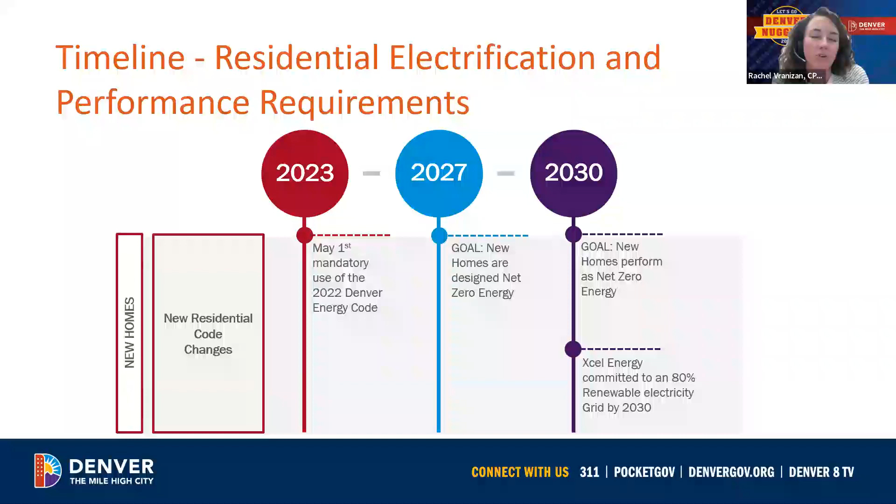This means we all have a part to play in making these changes, and we have time to accomplish them incrementally. The Denver Energy Code is grounded in input from a wide variety of community members and stakeholders, and we would like to thank all who contributed.

You can find the full 2022 Denver Energy Code at denvergov.org/buildingcode. A second printing of the full Denver Building and Fire Code, which includes the Denver Energy Code, was approved last week by City Council and is available on our website. The included updates are primarily housekeeping in nature, and all the relevant content has been incorporated into these trainings. Please take a look at the second printing to make sure you are referencing the most up-to-date version of the code.

I also want to highlight that Denver-specific ComCheck and REScheck are anticipated to be available in fall 2023.

You can find a wide array of additional resources at our Net Zero Energy Hub at denvergov.org/energycode. A recording of this training and the others in the series will be published on this page, along with resources on specific provisions and compliance options. Resources are being added continually, so please check back regularly to see the latest.

You will hear us use a single reference to a code section in the 2022 Denver Energy Code. This is because the 2022 Denver Building and Fire Code adopts the base codes as reference. It is a good practice to check Denver's code first to see if there are deletions or modifications to a section, then reference the base code.

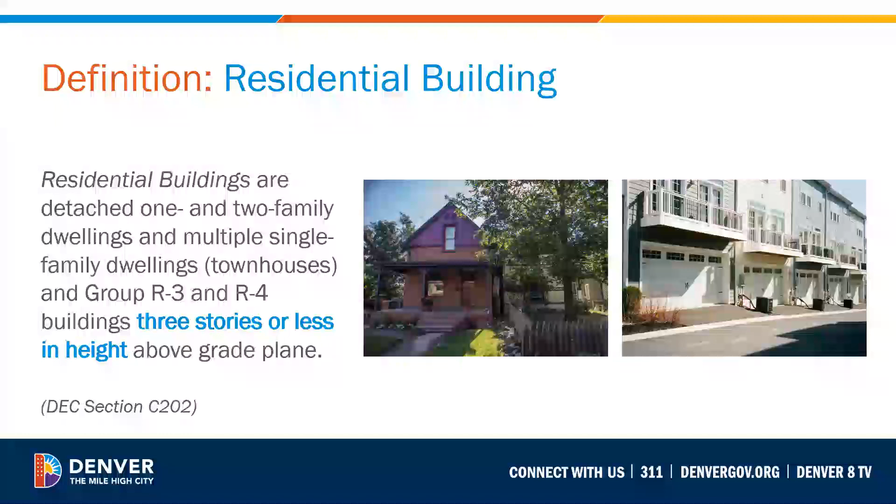As we begin today's presentation, I wanted to take a quick moment to review the definition of residential buildings. We've reviewed this definition in the past three presentations, so I'm not going to spend time reviewing it again here, except to really urge you to fully understand the definition and potentially take advantage of all the recorded presentations on the City of Denver's website.

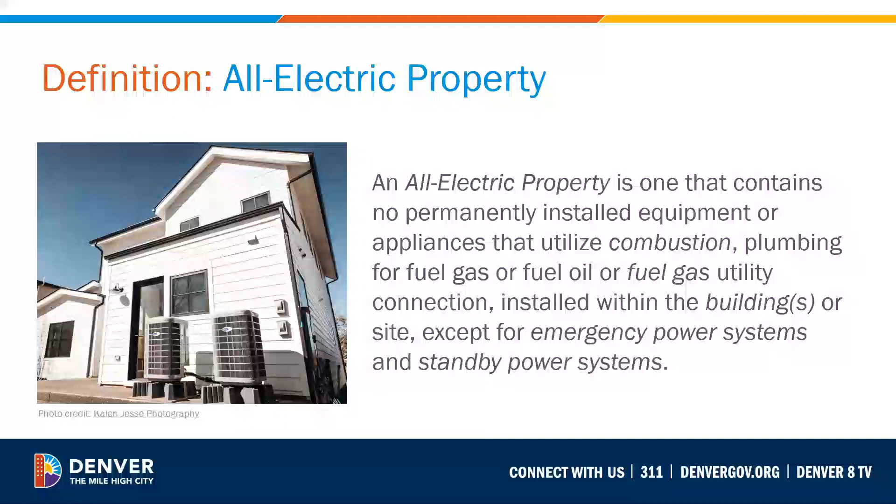All electric properties is a newly defined term that you should become familiar with. An all electric property is a property that contains no permanently installed equipment or appliance that utilizes gas or gas equipment for combustion within the building or on the site. The exception is for emergency power systems and standby power systems, such as gas-powered generators. Know that there's no exception for gas fireplaces, indoors or outdoors, or for any type of connected gas barbecue outside the home.

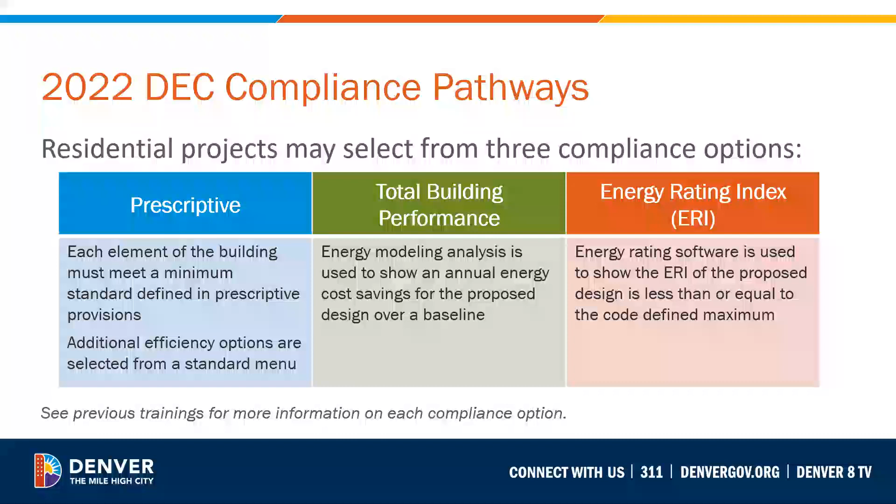The City of Denver uses a variety of options to demonstrate compliance with the Denver Energy Code. There are two options within the prescriptive path and two options in the performance pathway as well. I recommend that you review the specific prescriptive and performance compliance trainings that happened over the last few weeks, which are available on the city's website.

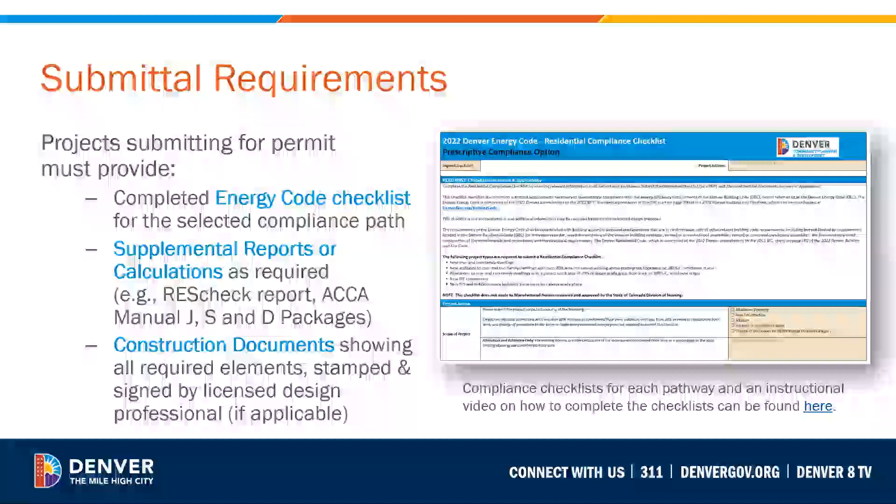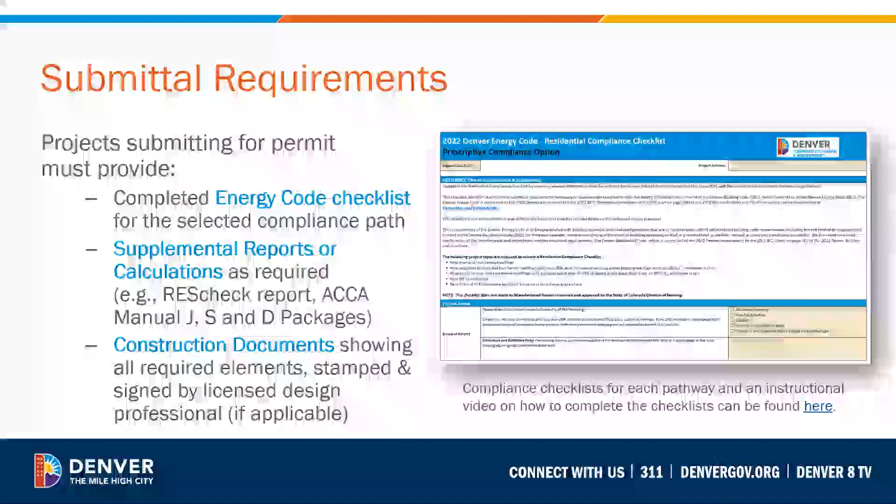Quickly, we're going to review some of the submittal requirements. Be sure to review and use the Energy Code checklist to understand requirements that have been implemented, and understand all the supplemental compliance reports that have to be generated for submittal, as well as to receive the certificate of occupancy, such as the UA compliance report, the cost compliance report, and the energy rating compliance reports that we're going to be talking about specifically today.

In addition, you should understand all the specific information that's required to be on the construction documents themselves. This includes the HVAC design, air sealing details, and the window to floor area calculation to determine the required U factor of the windows that need to be installed in your particular project.

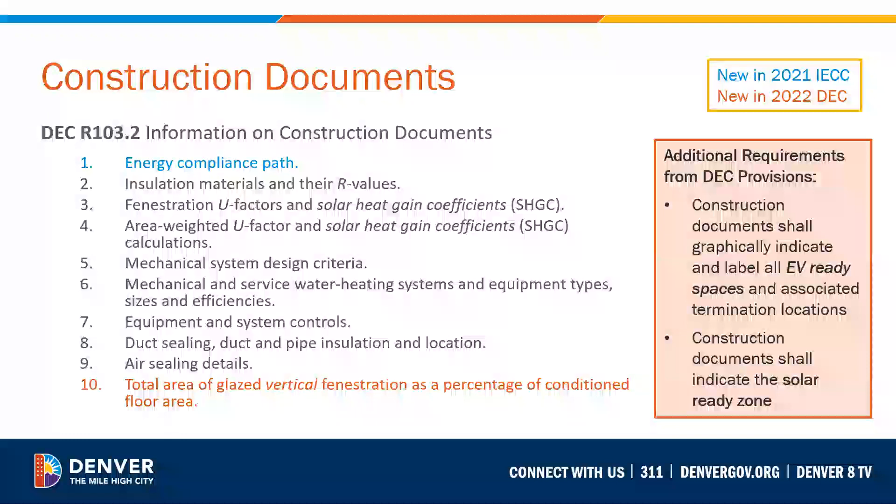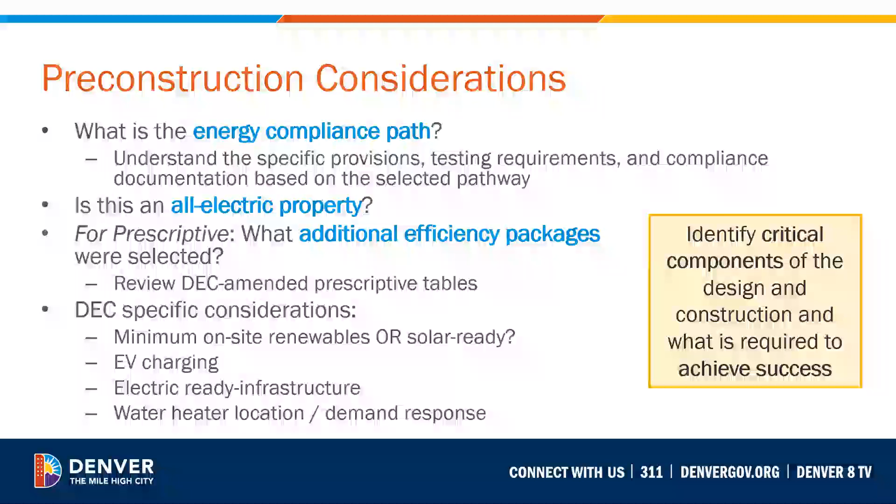When planning your project and creating the construction documents for submittal, we suggest that you clearly define the Energy Code compliance pathway, whether the project is an all-electric project or not, whether the project will have to comply with any of the additional efficiency package options in sections R408, and how you're going to address the Denver Energy Code specific provisions like on-site renewable provisions, EV charging, electric readiness, and water heater location provisions that we discussed in last week's training.

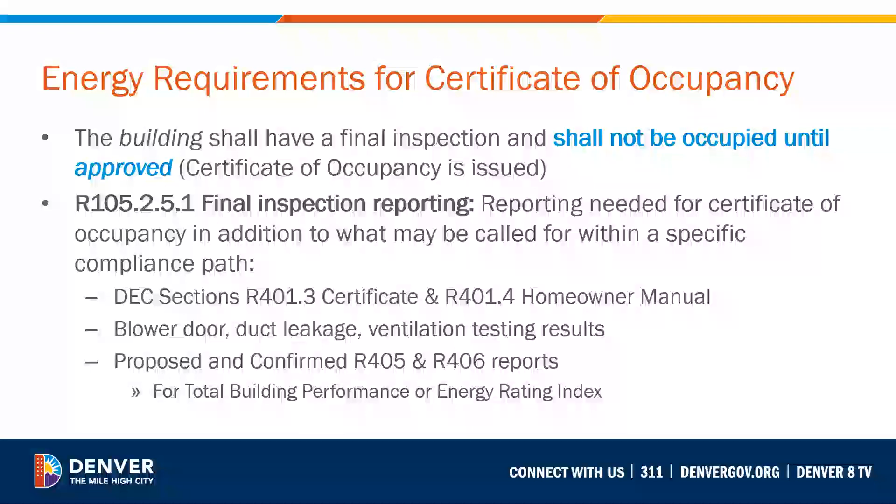The building obviously must have a final inspection and can't be occupied until the project is inspected and receives its certificate of occupancy. All the additional final compliance documentation also must be collected and reviewed before the home is occupied, and this includes all the final testing reports, as well as the...

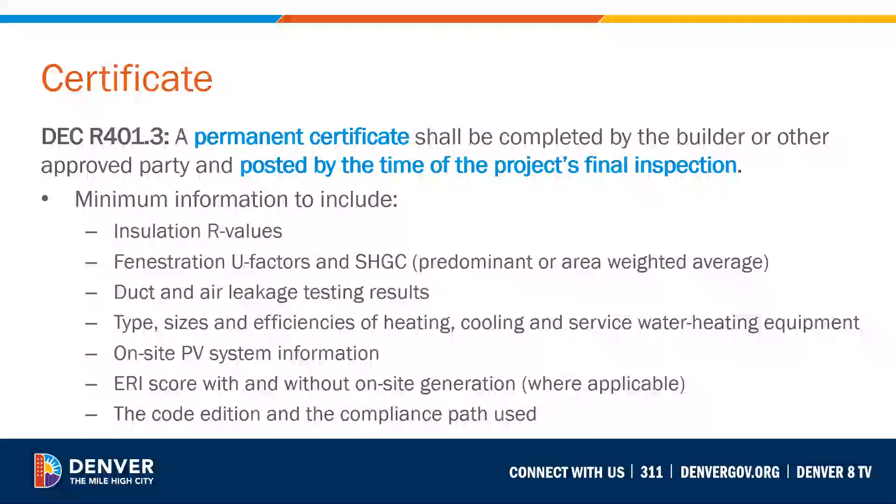R401.3 certificate. The project's final R401.3 certificate is not new to the Denver Energy Code, but there are some new items that have been included in the certificate, such as the PV system information requirement. It's recommended that you review these requirements so that nothing slows down your issuance of the certificate of occupancy at the end of your project.

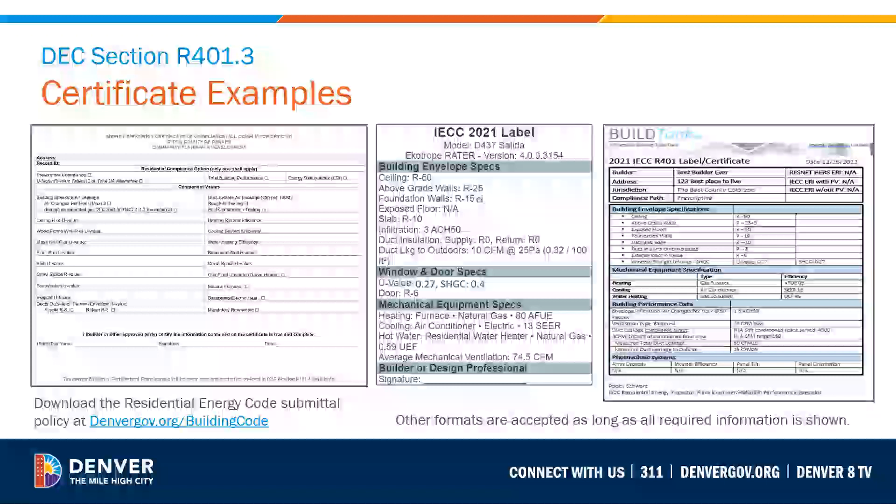Also, the City of Denver has created an R401.3 certificate template that you can use. There are certificates that can be created directly out of the software and printed out of the software, and you might see some hand drafted certificates out there as well that comply, especially when you're doing compliance with the R value and U value table compliance pathways.

So ultimately, as long as the certificate includes all the required information, including the Denver specific provisions, any of the formats are allowed by the City of Denver, but know that you have this template that you can use if you need to.

The homeowner's manual requirement is new for the Denver Energy Code, and it must be delivered to the house before occupancy. The manual must include all equipment and appliance manufacturer installation manuals and any energy assessment or energy rating index report, for example. Other pertinent information, like the yellow energy guide labels for all appliances, can also be included, but there's no specific requirement for what else needs to be included in that manual.

Okay, we're going to move on to considerations for the prescriptive path. When considering the prescriptive compliance pathway, remember to go back and look at the other presentations that are now posted on the City of Denver's website. We'll review some of the items covered earlier, this time from a contractor's perspective, but we are not going to be reviewing all of them. So you should go back and double check those presentations.

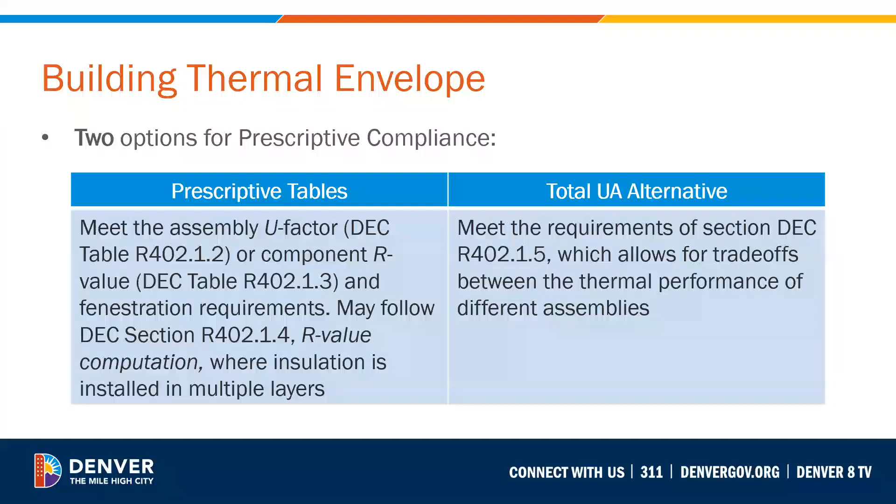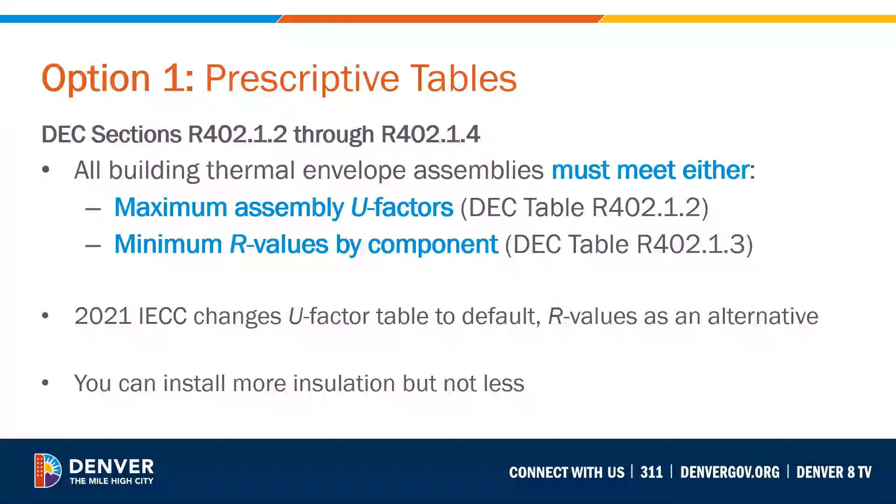Again, there are two prescriptive options for building thermal envelope compliance with the code. Option 1 uses the assembly U factor and component R value tables, and option 2 is a trade-off approach that uses a total area weighted U value energy modeling approach to demonstrate compliance. When using the prescriptive table option, you must choose to either use the required maximum assembly U factors listed in the table or the minimum R value by component requirement listed in the table. This compliance option is the least flexible, because you're only allowed to do more than what is required by the table there, not anything less. We'll see in the performance compliance options coming up that they provide additional design flexibility when considering the specifications for your project.

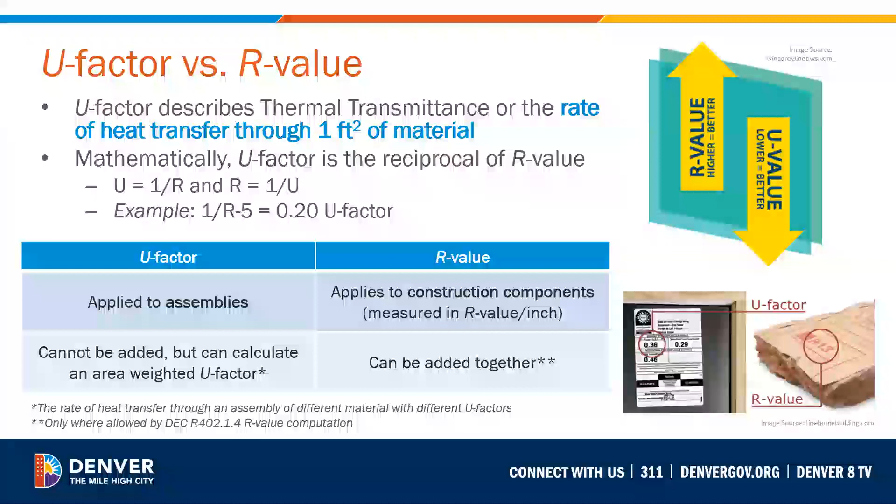Now we need to do a quick review of U factors and R values so we can understand these tables in more depth. A U factor describes thermal transmittance, and is the reciprocal of the R value. So if you start with an R value of 5, that's equal to 1/5, or a U factor of 0.20. U factors are used to describe assemblies, and R values are used to describe construction components. An R value describes the material's ability to resist the flow of energy, always from more to less, high to low, or from higher concentrations to lower concentrations. The higher the number, the greater the resistance to the flow of energy. For U factors or U values—those two terms are kind of interchangeable—the lower the number, the greater the resistance to the flow of energy.

When using the prescriptive compliance approach, you can also use the R value computation method. For example, if you install flash foam and fill the remainder of the cavity with blown fiberglass, you can add together the R values of each individual insulation component to get the total R value of the insulated cavity. Note that in the code, continuous R value requirements are separated from cavity R value requirements, and the R value table describes the component R value, not the assembly. Therefore it excludes framing, air films, and the like that are included in the U factor assembly table. The U factor table is also used to build the code reference home that I'll be showing you in just a few minutes.

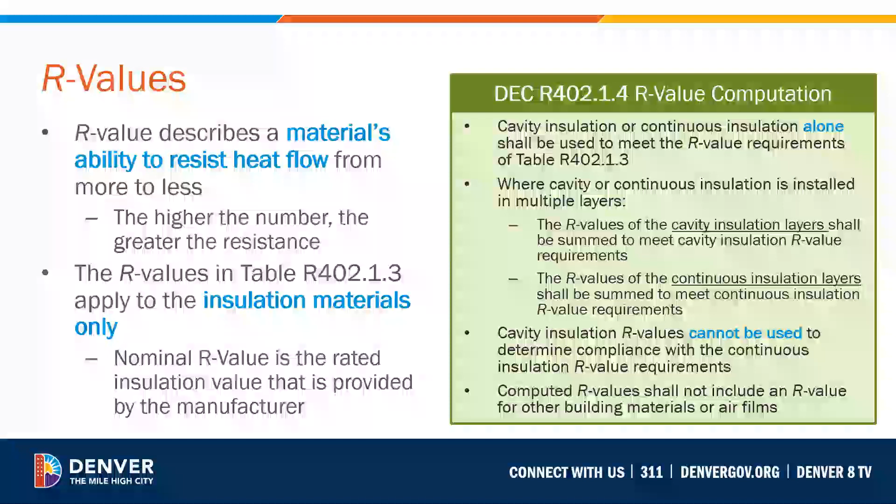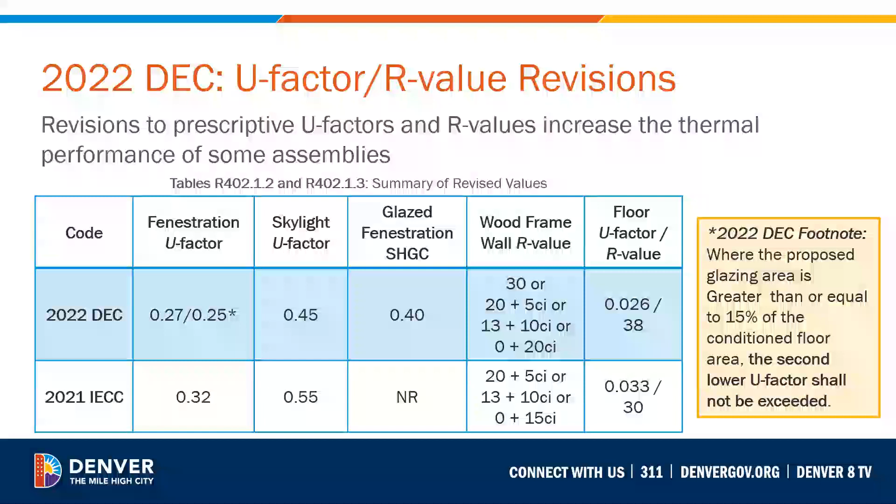Now, we know that windows are simply the weakest link in the building assembly. As you can see here, the R value of a wall assembly is about 3 times more than the R value of a good performing window. Therefore, the lower the window to floor ratio, the higher the total wall R value and the less heat loss in cold months, for example.

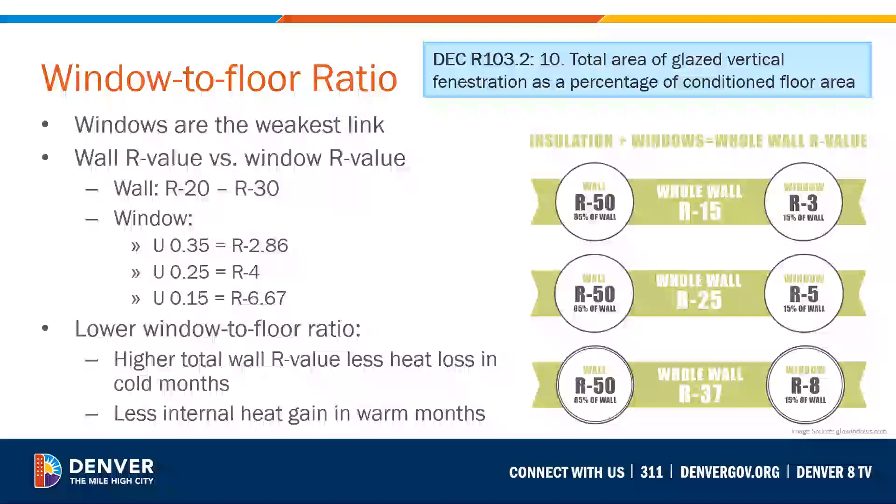This is why the window to floor ratio is used in the Denver Energy Code prescriptive compliance pathway to determine the U value requirements for the windows that need to be installed in your project.

Now, moving on to the second prescriptive compliance option for building thermal envelopes, it's called the total UA alternative. UA stands for area weighted U value. This is a software modeling compliance approach.

You should note that if a project is designed to the prescriptive R value and U value tables and a specification change happens in the field, you'll likely be required to do a total UA analysis to verify compliance. We'll cover that again here in a second.

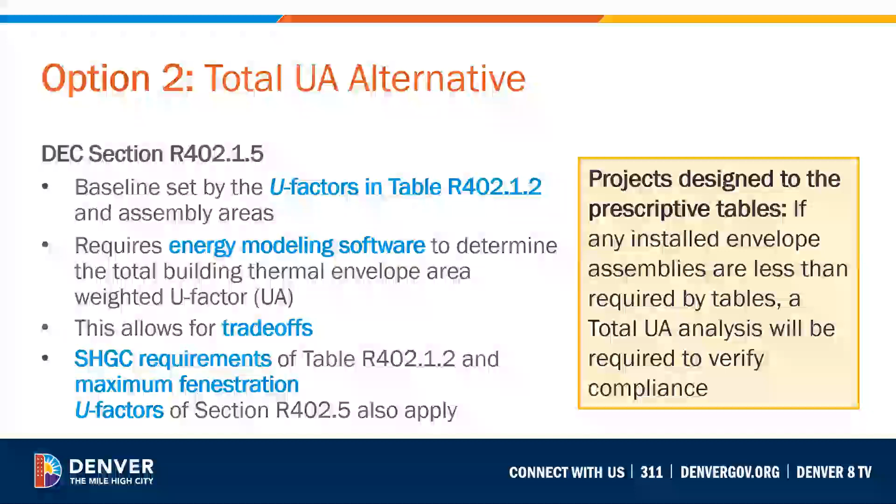When we talk about using software to demonstrate compliance with the Energy Code, we have to understand the concept of the reference home and the rated home. So when we build a home within an energy model, the energy model creates 2 homes that are geometric twins of each other. One is called a reference home and one is called a rated home. Now, a reference home is specifically defined as a standard set of specifications that generate a specific, consistent, and quantifiable energy performance for that particular program or code.

So the reference home in this case is overlaid with the U factor table to give it that standard specification for energy performance. The rated home specifications are created by the builder and the design team, maybe the architect as well. The rated home is compared to the reference home, and if the rated home's performance is equal to or better than the reference home, then it will demonstrate compliance with the code.

So when we talk about total building thermal envelope performance, the area weighted U value of the proposed building must be less than or equal to the total area weighted U value of the reference home, resulting from using that U factor table. The U value or the area weighted U value in the energy model includes thermal bridging or framing, air films, and all the layers in the assembly, which is why this pathway is called an assembly approach for compliance.

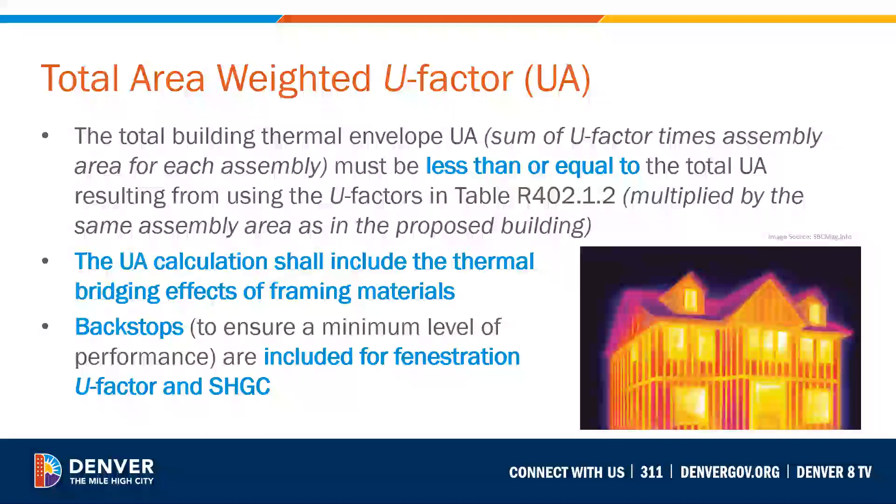Section R402, 402.5 specifically states what the maximum area weighted fenestration U factor and solar heat gain has to be. So these are what we call backstops, which ultimately prevent trading off beyond a specific point, with the ultimate goal of protecting the building thermal envelope from excessive trade-offs.

Now, trade-offs are used to put something more in one assembly so that you can put something less in another assembly to gain more flexibility in designing the specifications for your house. Again, in this pathway, you can only trade off U values and R values when using the UA alternative approach.

So for example, in order to get a balanced energy equation that meets the intent of code, the blue ball in this balance equation here might represent ceiling insulation that's R38, which is significantly less than the requirement in the prescriptive pathway for R60 in our ceiling insulation.

In order to have that balanced equation, the 3 silver balls might represent better windows and wall assemblies around the building thermal envelope that exceed the minimum prescriptive table requirements, and thus give us this balanced equation with more flexibility in how to design our assemblies that we're going to put into our home.

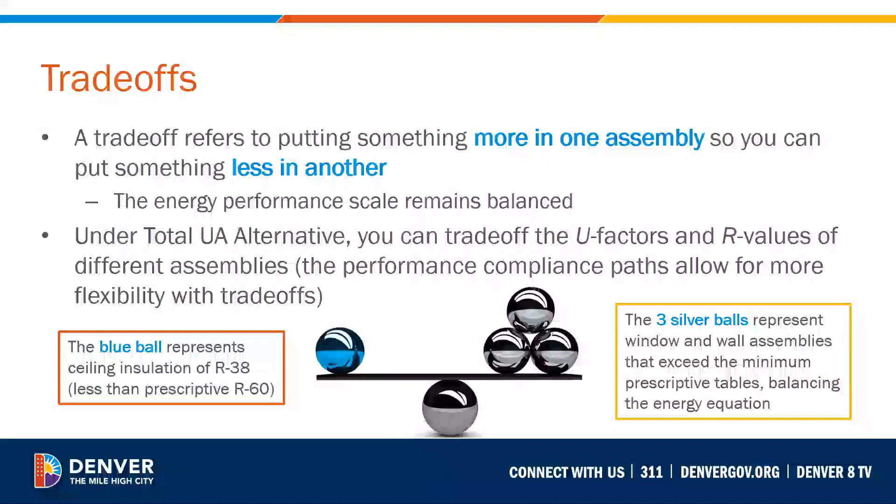The area-weighted alternative offers this flexibility, and it demonstrates compliance using R values and U values that are in those tables. This is a method of performing conductive energy trade-offs. However, we have to remember that with this approach, you're only able to trade off R values and U values in the building's thermal envelope. You'll see in a bit here that the performance compliance approaches allow for more than just conductive energy trade-offs, and thus more design flexibility.

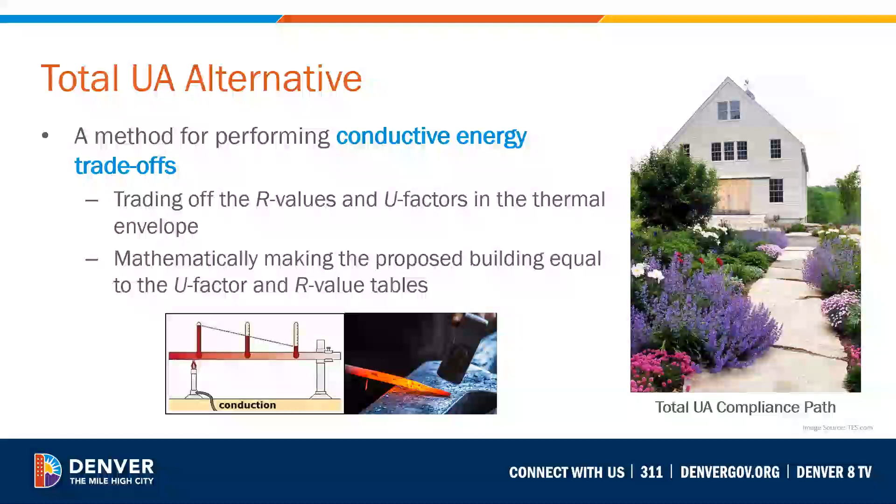While there are multiple softwares available that can calculate the total UA of a building, only the REScheck software, which is a free software developed by the U.S. Department of Energy, is going to be adapted to include the Denver amendments to the IECC. Therefore, no other software can be used to demonstrate compliance. Right now, the Denver Energy Code version of the REScheck software is still in development and will be available in the fall of 2023.

So to be clear, although softwares like Ekotrope and REM/Rate can do the UA calculation, only REScheck is allowed to be used for the Denver Energy Code total UA compliance pathway, because only the REScheck software will incorporate the specific Denver Energy Code amendments for prescriptive compliance.

Again, the REScheck software modification will be released in the fall, and this is an example of the REScheck report that the City of Denver will require to be turned in at permitting when using the total UA alternative compliance option. Now let's look more closely at that blue box there.

In the blue box, you can see that compliance in this case has been demonstrated using area-weighted U values of the reference home, which is the maximum area-weighted U value, and the rated home or builder home, which is your area-weighted U value. You can see that 292 is better than 328. Therefore, we have compliance here, and in fact, it's 11% better than the reference home compliance, or base 2021 IECC compliance.

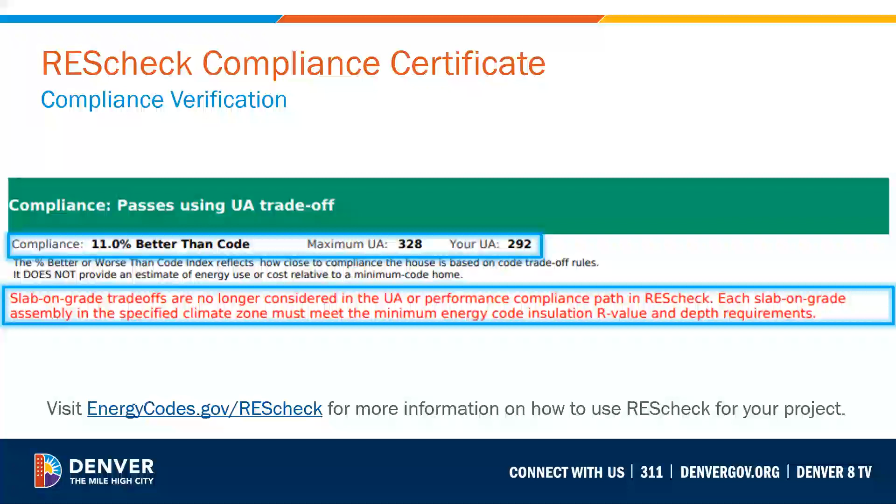Now, you'll also notice the other blue box here, that slab edge insulation can't be traded off when using this pathway. So you want to make sure that you understand this if you're doing a slab on grade construction or a walkout basement that includes a slab on grade.

Now, because the customized REScheck software will not be available until the fall, the City of Denver has developed a REScheck workaround so that the current version of REScheck can be used until the customized version is released. In the REScheck workaround, the additional calculation will have to be done by hand. We explained this in depth in the previous trainings, so you want to go to those trainings and make sure that you have a good understanding of this REScheck workaround process.

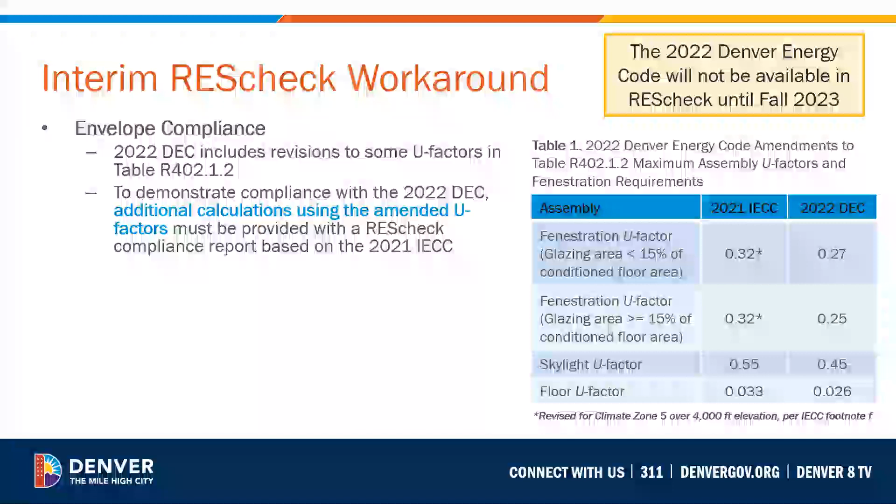In general, if something is installed that is better performing than proposed in the prescriptive compliance reports, then you should be okay if something changes in the field. If something is installed that is less than approved by the building permit, you will have to submit possibly a new UA compliance report to demonstrate that the trade-offs still create a balanced energy equation and meet the intent of the energy code. Remember that you cannot trade off when using the R value and U value tables. Therefore, if something changes in the field, it has to be better than in order to pass code through the inspection process. In addition, the city may require additional documentation, or you'll have to move to a REScheck software modeling compliance approach to demonstrate compliance with the code.

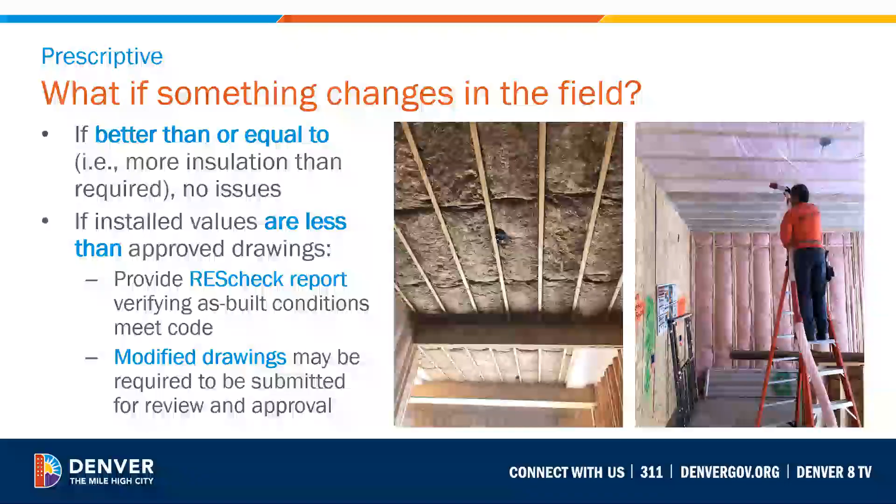Okay, we're going to move on to considerations for the prescriptive path and these additional efficiency packages. Prescriptive compliance requirements mean that a project must comply with the entirety of all applicable provisions located in sections R401 through R404. Additionally, prescriptive projects only have to also comply with the additional efficiency credits required in sections R408. The number of credits a project must comply with is dependent on the building type and whether it's an all-electric property or not.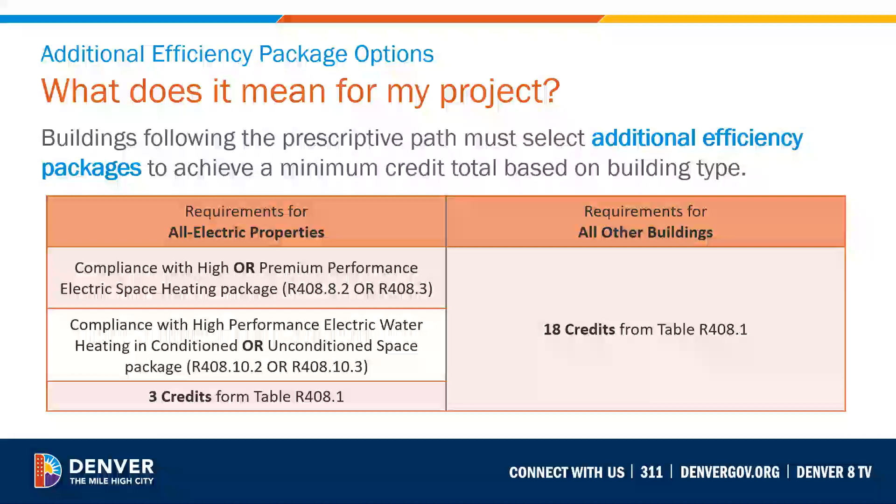All-electric buildings have an easier way to comply with these additional efficiency packages, in order to promote building electrification and to align with the zero energy goals that the city has.

Tracking the additional efficiency credits can be a little bit complex, so be sure to utilize the new R408.1 planning tool that's been embedded into the prescriptive code checklist available on the city's website.

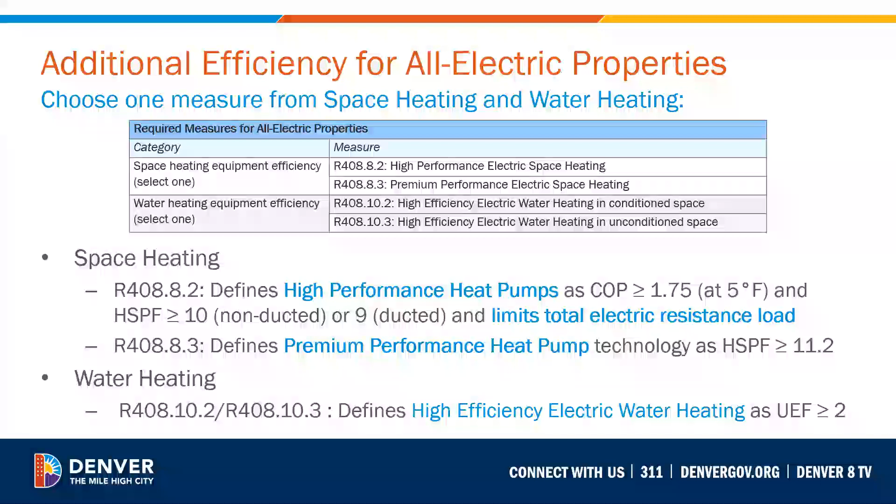Here is an example of what an additional efficiency requirement looks like for an all-electric home. You need to choose a space heating and water heating option based on the parameters outlined in R408 of the table here. So in this case, you have to choose either a high performance heat pump or a premium performance heat pump for an all-electric building. Then you need to choose an option or multiple options that equal 3 or more credits to fully meet the all-electric additional energy efficiency requirements for the code.

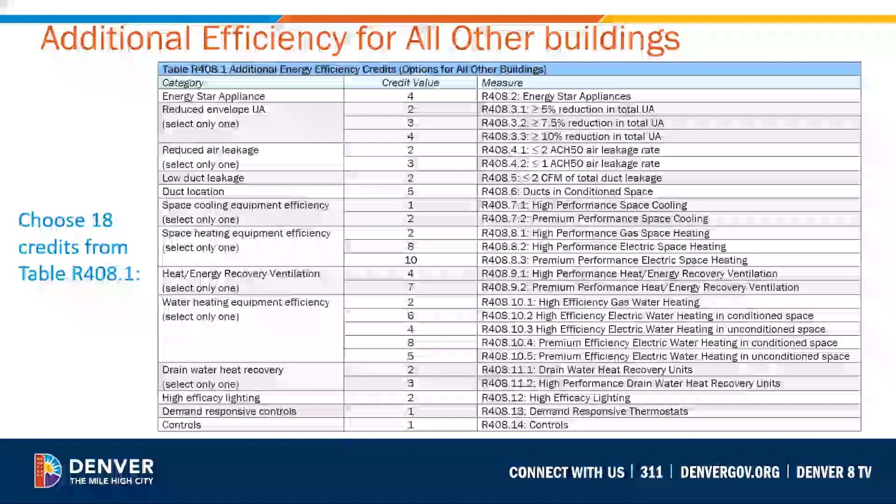For all other buildings that are not all electric, you will need to choose and implement 18 credits from the list of additional efficiency options on this checklist. Remember to review the recorded prescriptive compliance presentation or the Denver Energy Code itself for more information on the additional efficiency option requirements and what they actually are that you can choose from.

At submittal, fill out the prescriptive code compliance checklist, which we just reviewed. You only have to fill out either table 1 or table 2, depending on the building type, whether it's all electric or not.

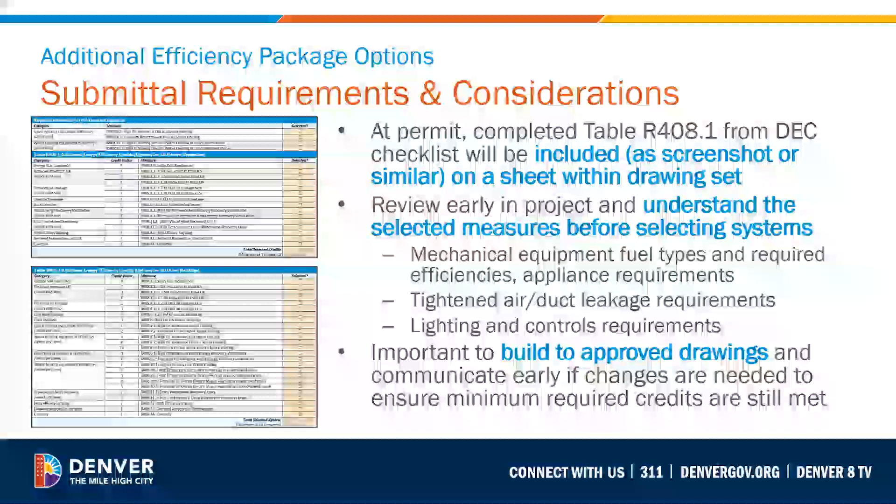In addition, you'll have to include your table choices on the construction documents for permitting of the house, because your choices will be reviewed for permitting and also inspected in the field to confirm compliance before the certificate of occupancy is released.

Even though it does not offer as much flexibility, the prescriptive compliance options are more straightforward than the performance approaches that we'll cover here in a little bit. There is no requirement to turn in a compliance document that confirms that the energy specifications that were proposed were actually installed in the as-built home. Field inspection alone is used to ensure compliance.

If you fail a site inspection, you may be required to provide an updated REScheck report in addition to fixing any requirement that may have failed.

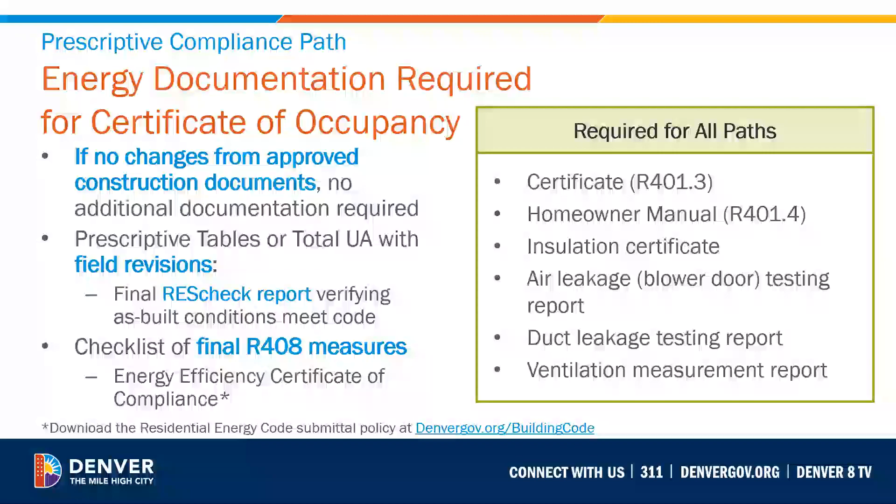Now let's look specifically at the total building performance compliance option. This section is R405, and it establishes criteria for compliance using a total building performance analysis. The analysis only includes heating, cooling, mechanical ventilation, service water heating energy use, or building assemblies or components that directly affect the building thermal envelope.

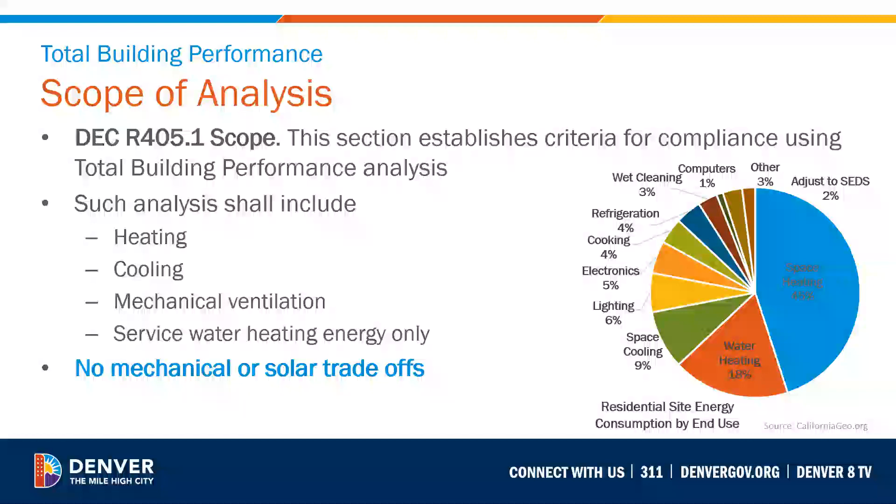This compliance option does not include mechanical or solar trade-offs. And you can see here in the pie chart on the right that heating, cooling, and water heating are the largest energy demands on the home, and that's why the Energy Code concentrates on them specifically.

As I said earlier, the energy modeling creates two homes that are geometric twins of each other. However, now the reference home specifications are defined in a table in section R405 within the IECC itself that you can take a look at. The proposed design specifications are set by the builder and the designer. And just like earlier, the proposed design is compared to the reference home to determine compliance with this compliance pathway.

So what does this mean for your project? The project design must meet the requirements in table R405.2 and comply with any backstop, meaning that in this case, you cannot trade off below the building thermal envelope requirements as described in the 2009 IECC. Now, in reality, this backstop turns out to be pretty irrelevant for the Denver Energy Code, although it's written in the IECC itself and has been included in the Denver Energy Code.

And the reason is that the Energy Code requires all electric properties to be 5% better than the reference home, and that all other electric buildings or homes be 18% better than the reference home. This means that the specifications used will have to be close to or even better than required by the 2021 IECC, as the reference home used for 2021 IECC compliance uses the U-value table requirements that are in that code. So as you see here, the Denver Energy Code is asking you to be better than the 2021 IECC.

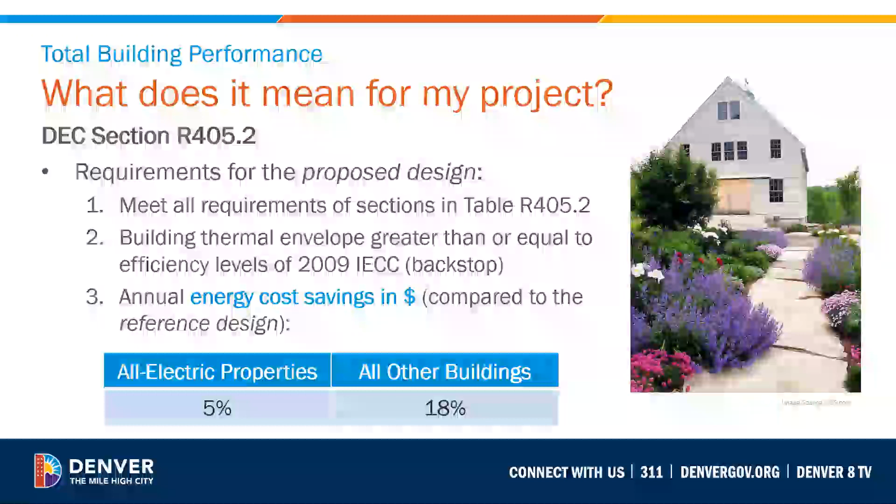Now, this is the R405.2 requirements table. And regardless of the compliance approach that's used for the project, there are additional requirements in sections R401 through R404 of the Energy Code. The 2021 IECC removed the language that described these requirements as prescriptive or mandatory. They are now just requirements and are listed out per the compliance option that you choose to use.

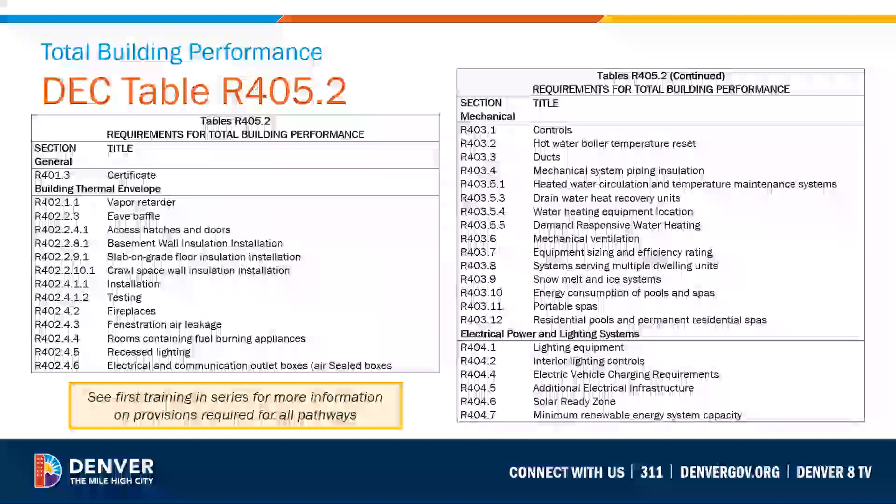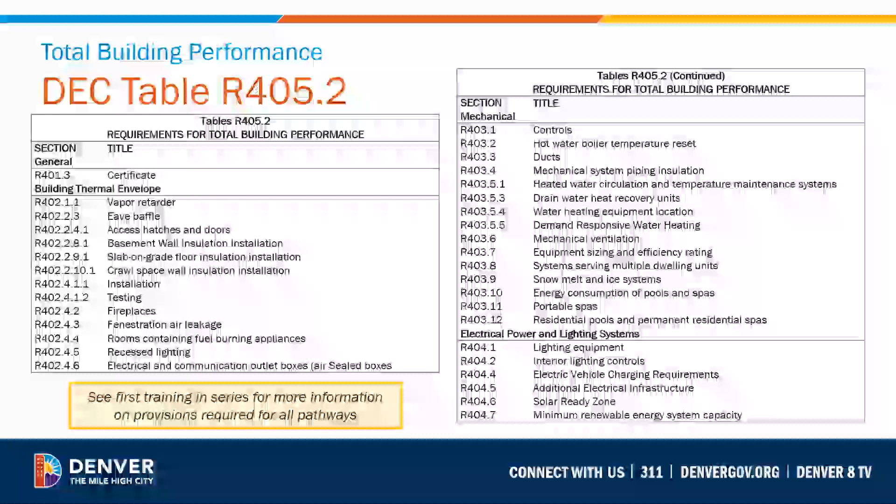In essence, though, you can think of these requirements as mandatory requirements that primarily address the installation of specific efficiency measures in the code. We spoke of these requirements in more depth last week in the recorded presentation, and that presentation is again available on the city's website for your review.

Now, especially when using the performance and energy modeling approaches for code compliance, it's important to realize the holistic and synergistic nature of the Energy Code and how it's implemented. The focus is on overall building performance over individual components, assemblies, or specifications. But a change in one area of the building can dramatically impact the building as a whole or other aspects of performance of that building.

Therefore, it's important for Energy Code compliance to be sure the building is built to the approved drawings and to focus on the installation of efficiency measures so that they perform and actually pass inspection. And then if changes are made in the field during the construction process, you'll need to consult with the design team, which may necessitate an updated energy model to demonstrate compliance.

Like the prescriptive compliance option, a cost compliance report for the proposed design must be turned in for permitting. This report must be marked as proposed because the energy model includes air and duct leakage default numbers, since the house hasn't been built yet. They're used to determine compliance before the house is actually built.

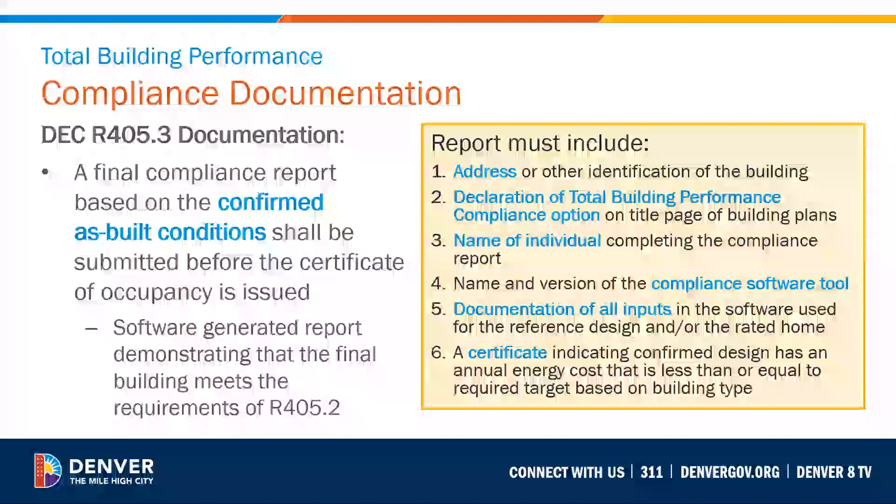Here's an example of the cost compliance report from the REM/Rate software. Note that this example home passes the 2021 IECC by 7%. Remember that this meets the requirements for all-electric properties in the Denver Energy Code, but would not meet the energy savings requirements for a mixed fuel or non-all-electric home.

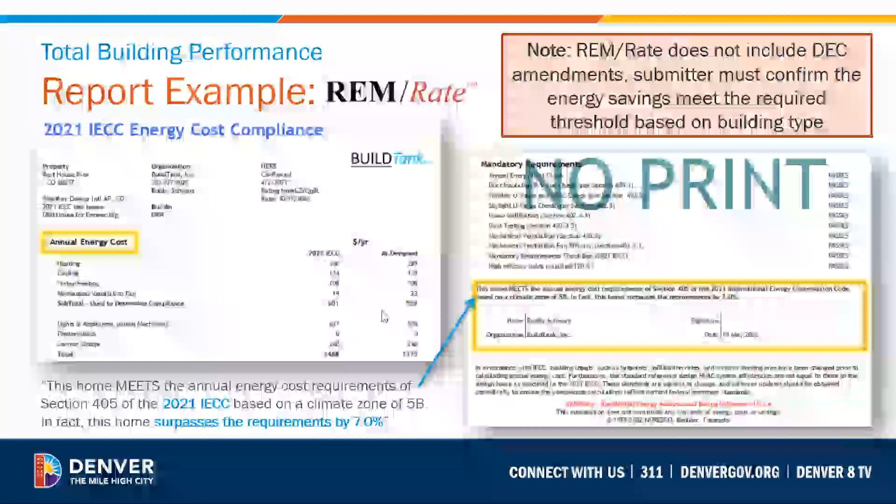Here's another example of a cost compliance report, this time from the Ekotrope software. This house is showing compliance by 5%, which again is better than the 2021 IECC and meets the requirements for all-electric homes in the Denver Energy Code, but doesn't meet the requirements for non-electric homes.

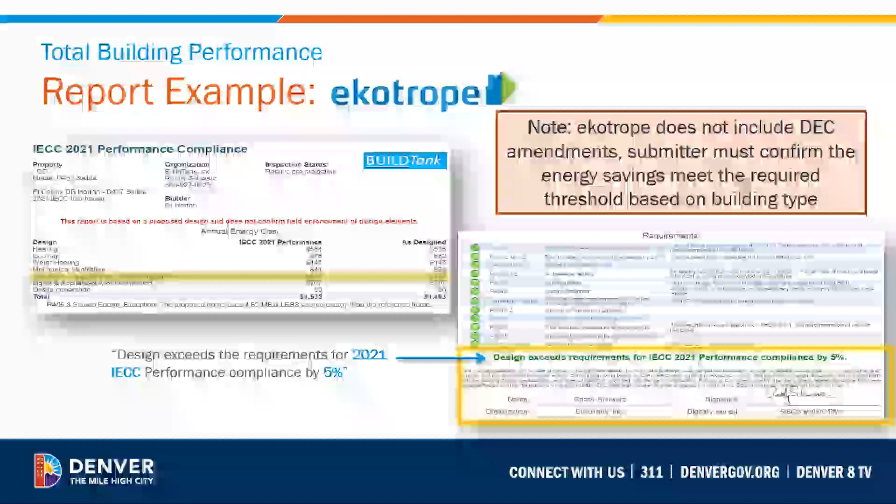As noted in the header of the software report, and regardless of the software that generates the report, it must note that this is a proposed design for permitting purposes. You have to realize that you have to create this report again and have it marked as confirmed in order to submit it for your certificate of occupancy to be released.

The confirmed compliance report is your final site cost compliance report that includes any information obtained during the inspection process of the home, such as the actual blower door and duct leakage testing results. If significant changes were made in the field, modified drawings may be required to be submitted for approval, and additional energy modeling may have to be performed.

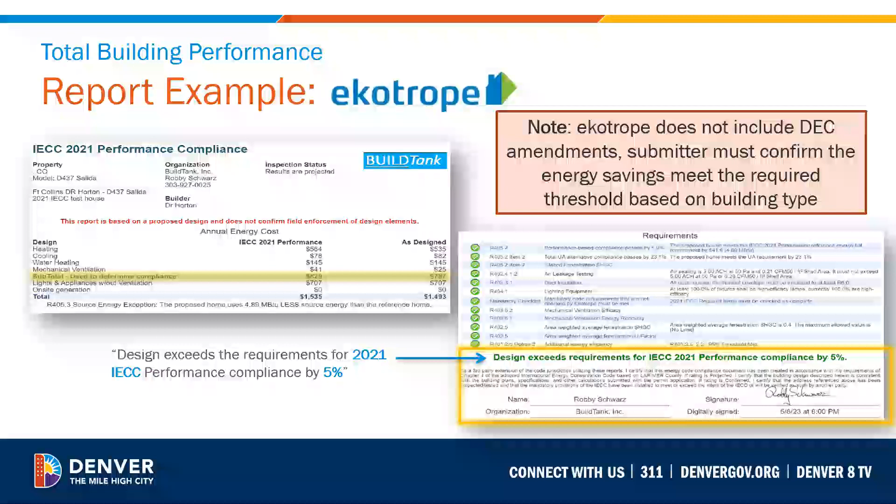Now we're going to take a look at the ERI, or Energy Rating Index compliance option. An energy rating index uses an energy model to perform a holistic energy assessment of the home. The energy model includes lighting, appliances, mechanical efficiencies, as well as R values and U values and more, to do what's called an asset rating.

The ResNet Home Energy Rating System, or HERS rating, is the most well-known energy rating system out there. You can think of an ERI score, or an energy rating index score, as a miles per gallon rating for a house. It doesn't matter who manufactured the house or the size of the house, in the same way that it doesn't matter who manufactured a car or the size of a car when you're evaluating that car from a miles per gallon perspective.

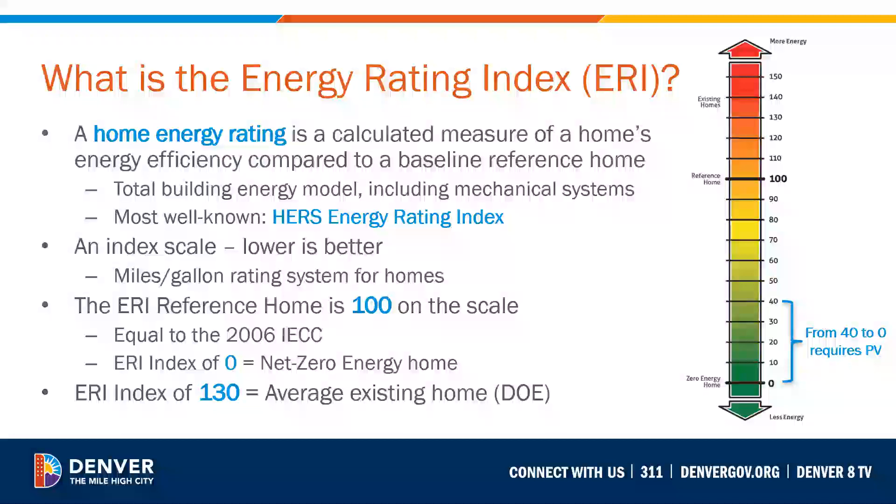An ERI index score of 100 benchmarks the reference home, and the reference home is benchmarked using the specifications of the 2006 IECC. The design performance presentation we did earlier is available on the city's website and goes into more depth on the ERI system if you need to understand that further. I'm going to continue here to talk about the IECC and how it used the ResNet ANSI 301 standard when they created the energy rating index score that's used by the Energy Code.

However, during the IECC code development hearings, they amended the ANSI standard ventilation requirement in section R406.3. This change to the ANSI 301 standard resulted in an IECC energy rating index score and a ResNet HERS energy rating index score for the same house being significantly different from each other. Therefore, like many other jurisdictions around the country, the Denver Energy Code has adopted the energy rating index based on the ANSI ResNet 301 standard with no ventilation amendment, in order to align better with the HERS ERI scoring system.

The goal of this adoption is to simplify the process and eliminate any confusion with the use of the ERI for demonstrating code compliance. So to be super clear here, the ResNet HERS ERI score is the compliance score used by the Denver Energy Code for this compliance pathway.

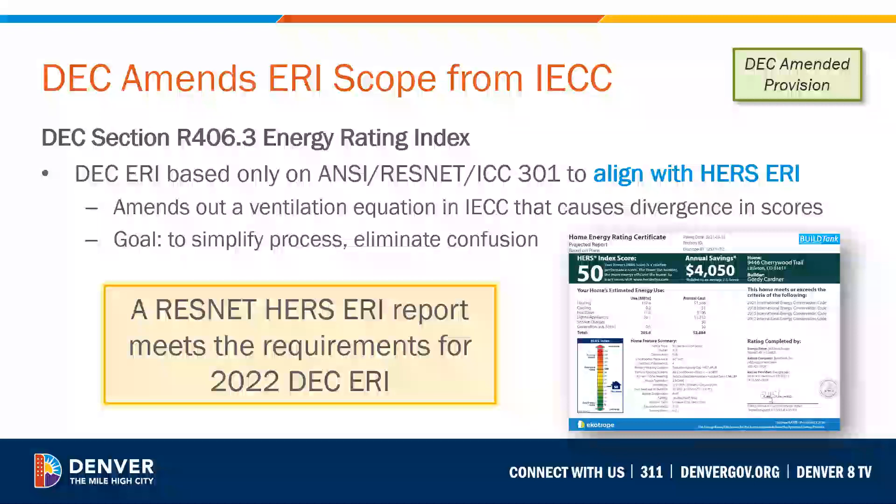Remember that within the software, there are two houses that are created that are geometric twins of each other. You have the proposed design, which is compared to the reference home. The reference home, in this case, is overlaid with the specifications required by the ANSI standard 301, which is equivalent to the 2006 IECC.

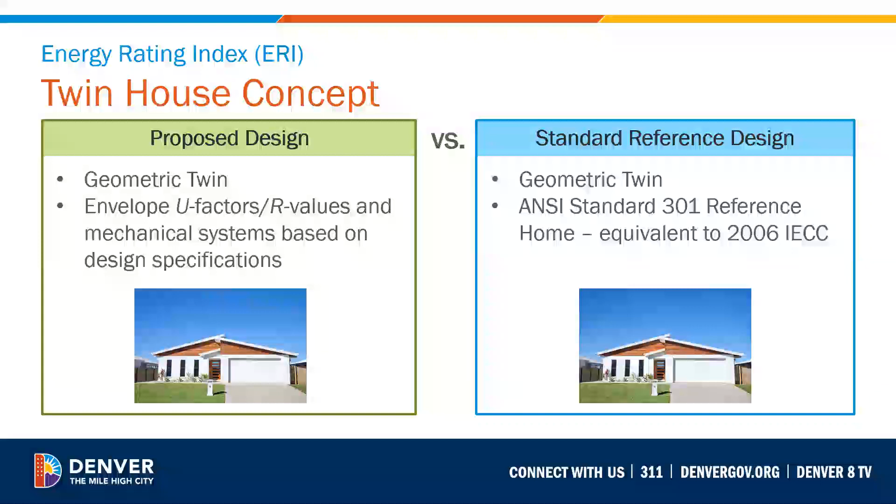The proposed design uses the specifications that the builder and designer have specified for that particular house. The objective of this analysis is to benchmark the proposed design as an ERI score in relationship to the ANSI 301 standard. What this means for your project is that the specifications you propose in the proposed design need to be able to perform significantly better than the 2006 IECC. In fact, they need to perform well enough so that they can achieve an energy rating index of 55 or less for an all-electric home, and 50 or less for all other homes that are not electric.

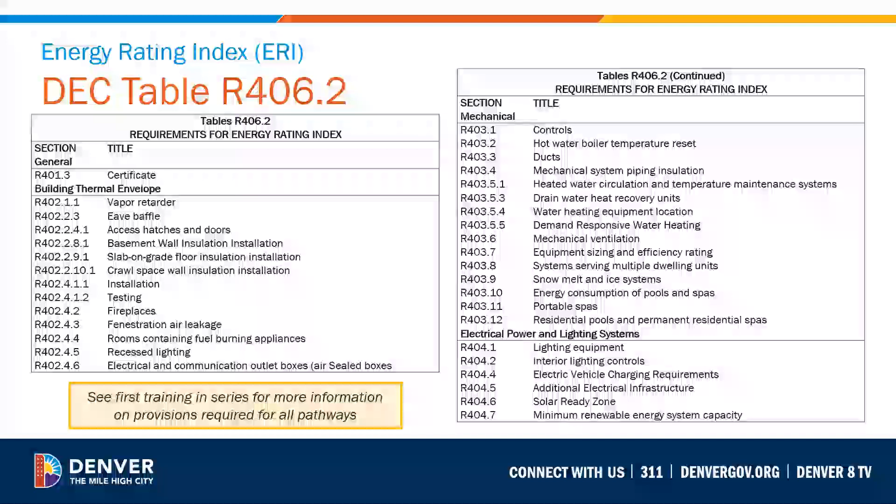In addition to this, your project will have to comply with the requirements listed in Table R406.2, which are the same requirements we just covered, the requirements in R401 through R404 that we covered previously in the total building performance approach.

Note that the additional efficiency packages in section R408 are only required for projects following the prescriptive compliance pathway and are not required when using either of the performance compliance pathways we've talked about. The reason is that the additional efficiency has been built directly into the performance requirements for both the total building performance and the ERI pathway.

Remember the 5% better and 18% better cost compliance reports required in the total building performance pathway, and the energy rating index scores of 55 and 50 in the ERI compliance pathway.

You should note that in the original printing of the Denver Energy Code, the requirements tables R405.2 and R406.2 for the performance compliance pathways inadvertently included some requirements that are not actually required. So a second version of the Denver Energy Code has been put on the website, and an errata has been published that you should review to ensure you're working with the most correct code language when determining your compliance pathways and ultimately compliance with the Denver Energy Code.

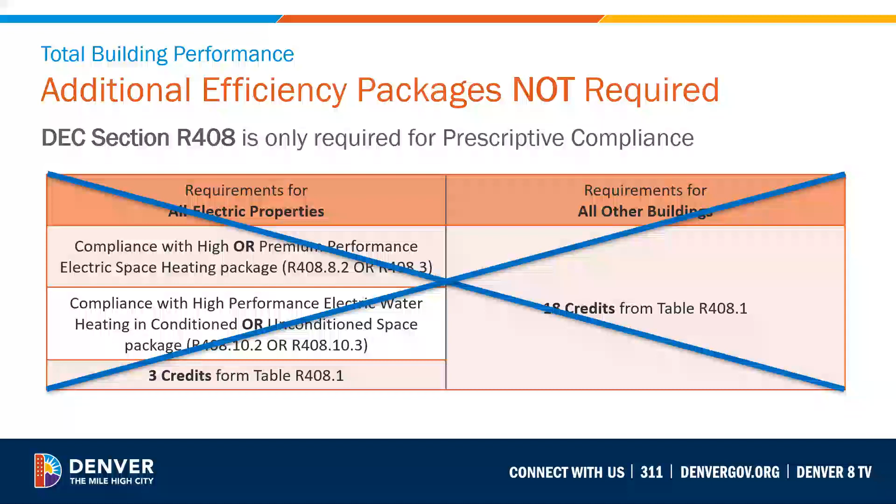As I said before, especially when using the performance or energy modeling approach for code compliance, it's important to realize the holistic and synergistic nature of the energy code, and if changes are made in the field, to consult with the design team immediately, which may necessitate an updated energy model.

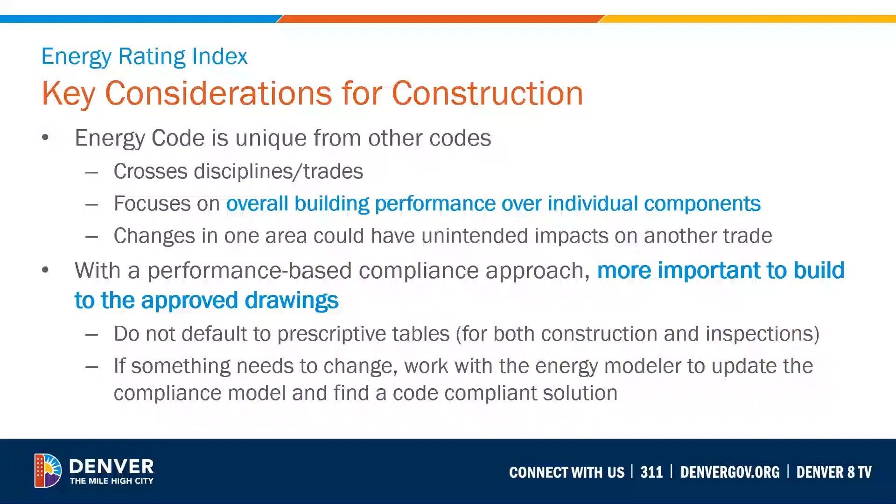As with the total building performance compliance report or process, your ERI reporting needs to be clearly marked as proposed for permitting and confirmed for issuing the certificate of occupancy, and also include all the information required by the code and reviewed on the slide.

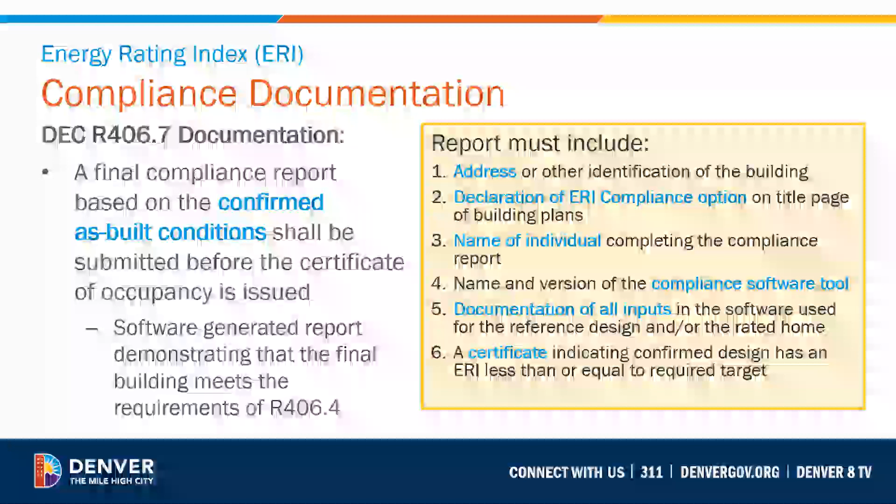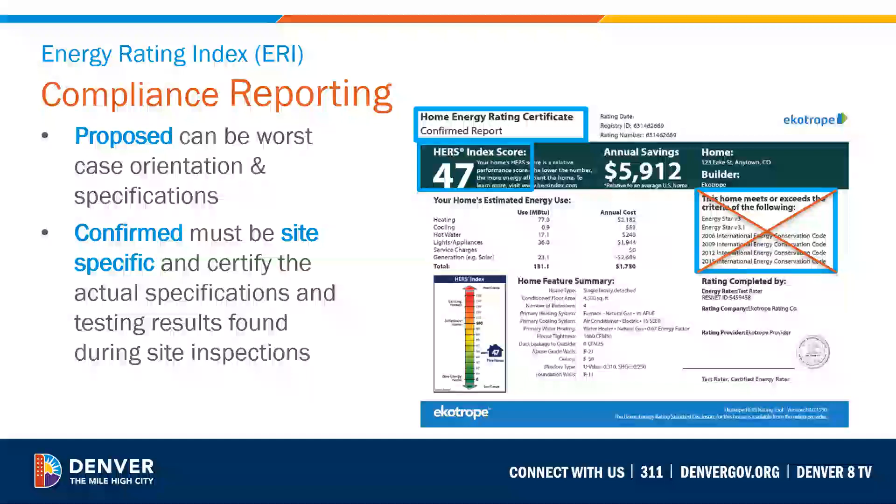Ekotrope and REMrate softwares are the primary softwares used in the Denver Energy Code, and used primarily in the Denver metro area to report compliance with the performance pathways of the code.

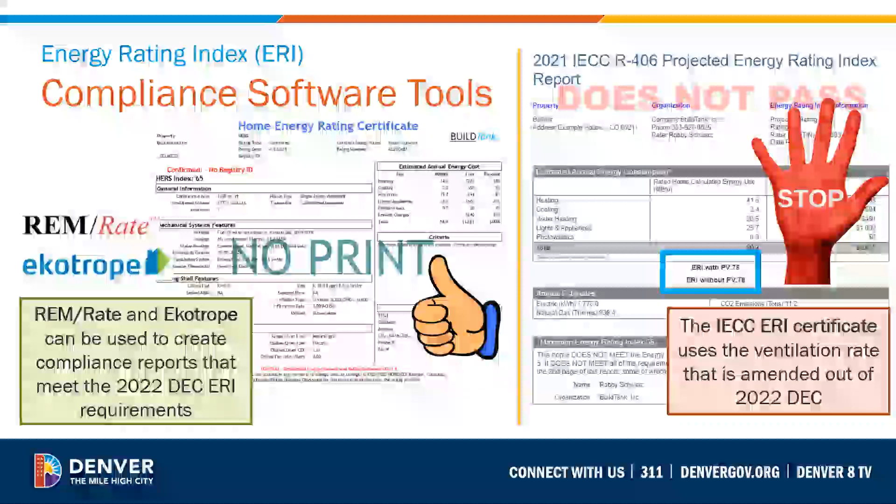On the left side of this slide, you'll see an example of an acceptable REMrate home energy rating certificate. On the right side, you'll see an IECC energy rating index certificate. This certificate is not accepted to demonstrate compliance with the Denver Energy Code. So only turn in a HERS home energy rating certificate from either the REMrate or the Ekotrope software.

Now we're going to spend the rest of our time looking at some existing building considerations. The Denver Energy Code addresses additions, alterations, and repairs, as well as change of occupancy in existing buildings in order to maintain or improve the energy efficiency of that altered building.

It's likely that you'll have to clearly define your existing home project in order to determine what you're actually going to be required to do by the Energy Code. So you'll want to review these definitions of the work categories for repairs, alterations, additions, and change of occupancies, so you'll have a better idea of what you actually have to do to demonstrate code compliance.

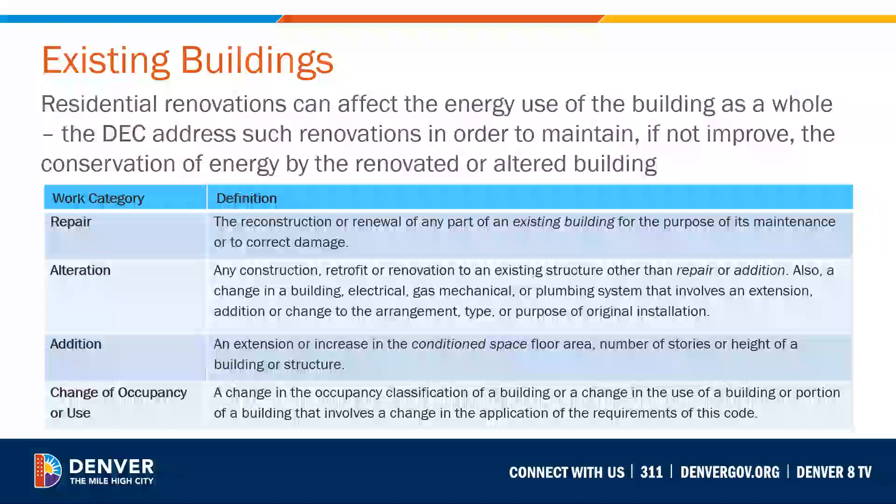In addition, you might have to ask yourself some questions about your project. For example, does your project scope fall into more than one work category? If it falls within more than one work category, the requirements of each work category are applicable and can be found in that specific section of the code.

That would be Chapter 5 of the Denver Energy Code. For additions, you want to ask yourself some questions, because depending on the size of your addition, you might be required to do things you wouldn't have to if your addition doesn't exceed 20% increase or 300 square feet, whichever is less. You might also want to know if your building is historic, because requirements for historic buildings differ from non-historic buildings.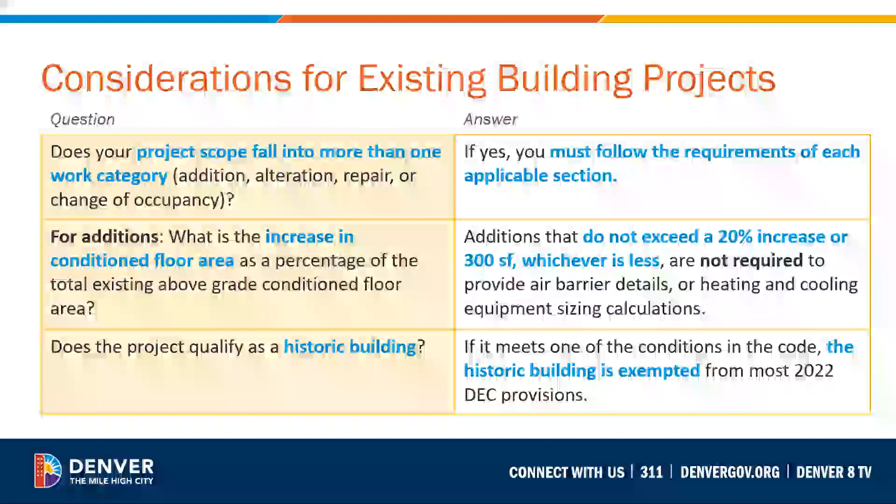At certain times of construction, we have what we call opportunity costs—our greatest opportunities to affect the performance of the home. These opportunity costs happen in new construction or when adding an addition or doing a renovation to an existing home. Addressing issues in the existing home at the same time as building an addition or renovating a kitchen is cost-effective and impactful on the comfort, efficiency, and cost of operating the home.

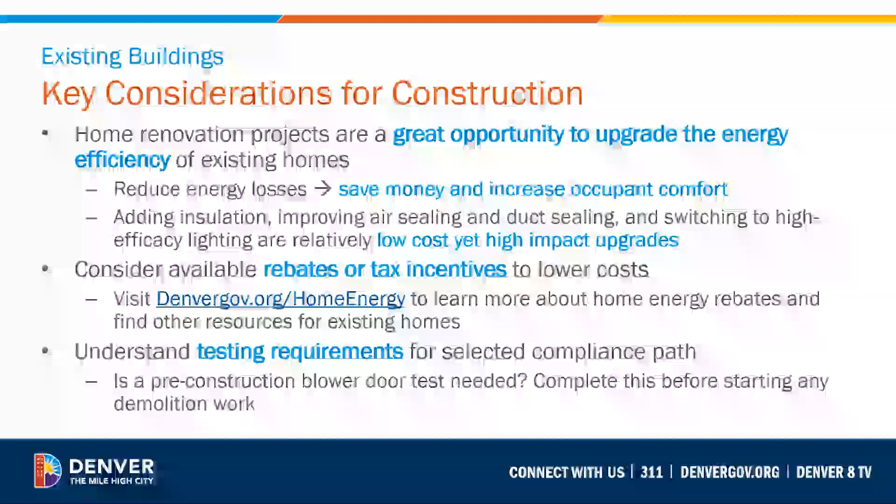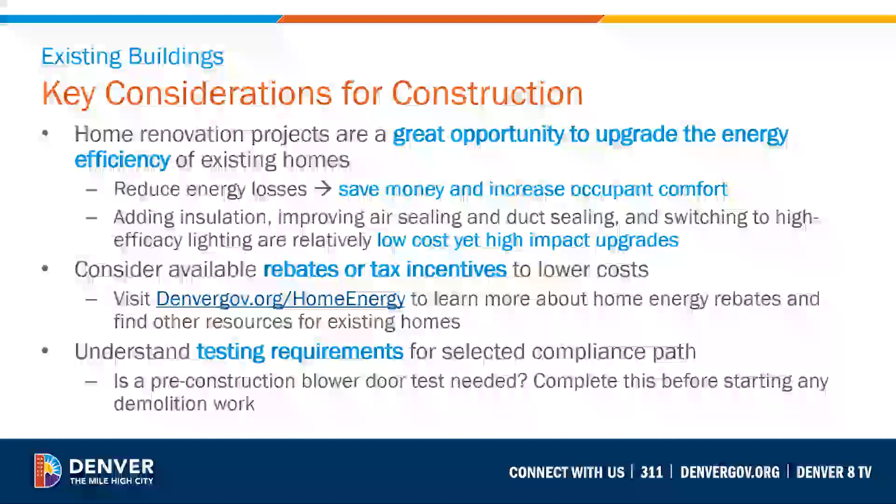Although not required, I always recommend getting as much information about the house performance before starting an addition or alteration of the existing home. This makes it important to understand your compliance pathway for existing building projects, as some pathways require pre-construction testing that could alter your thoughts about how to proceed. Also remember there are meaningful energy efficiency rebates and tax incentives available now that could change the dynamic of the existing home project.

New construction and work on existing homes are handled quite differently. The R408 additional energy efficiency options and some other requirements are not required for additions, alterations, and repairs when you follow the prescriptive pathway. However, if you're building a new garage, a carport, or adding a new on-site parking space, the project will have to comply with those EV charger requirements, and you'll want to take a look at those.

There are two types of additions defined by the Denver Energy Code, and you'll need to determine which type your project is creating. There are additions that create changes in space conditioning, such as taking an existing unconditioned attic and converting it into a bedroom, and there are additions that just add conditioned space or square footage to the house.

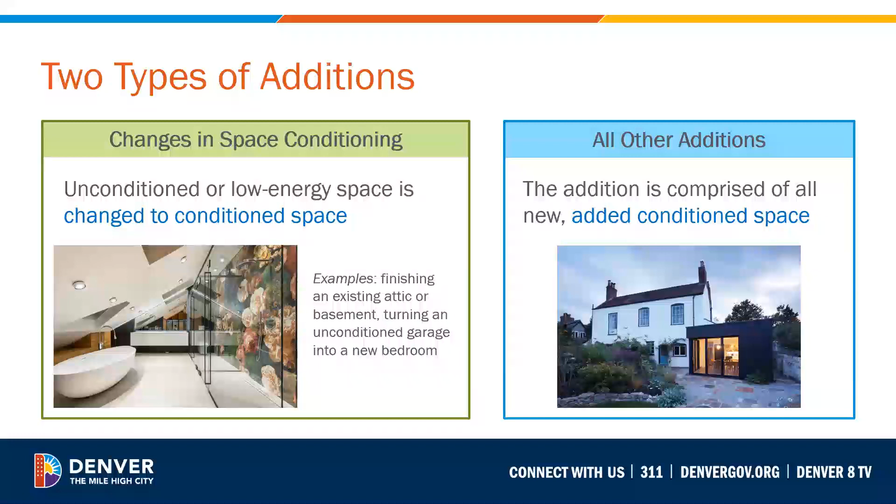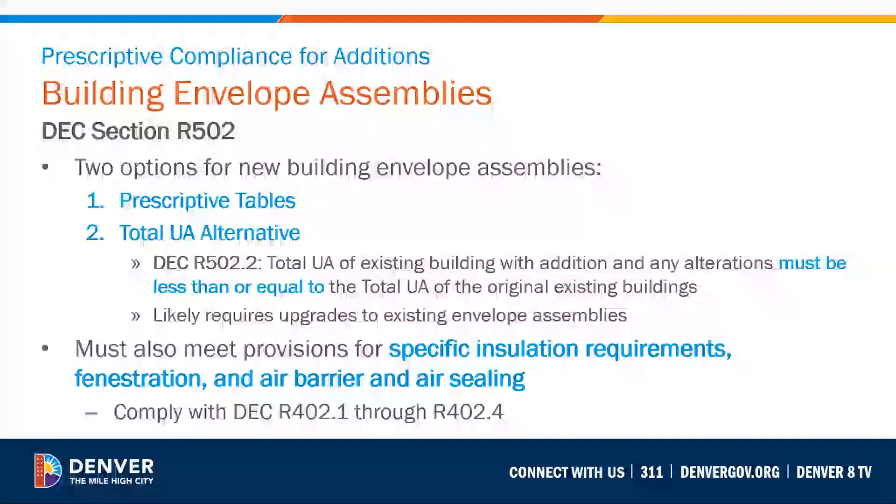There are two options for new building envelope assemblies when using the prescriptive compliance options for an addition. You can use the prescriptive U value and R value tables, or use the energy modeling approach with the total UA alternative. Regardless of the prescriptive approach you use, you'll also have to meet specific insulation, fenestration, air barrier and air sealing requirements, as well as vapor barrier requirements listed in the code.

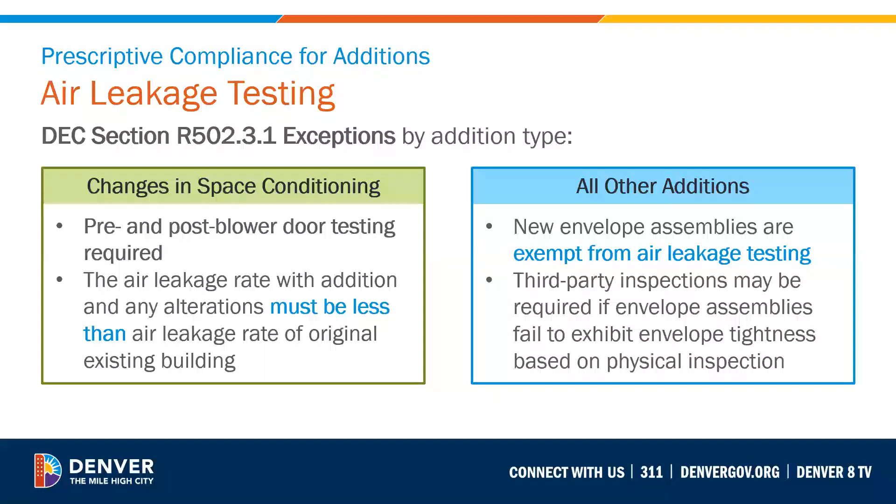Air leakage testing for prescriptive compliance is only required for additions that create changes in space conditioning, like the attic converted into a bedroom. In this case, the air leakage rate with the addition and any alteration must be less than the air leakage rate of the original existing building before any construction started. So you're going to have to do a blower door test twice in this case.

There are two compliance options for new building envelope assemblies when using the performance compliance options for additions. First, the annual energy cost of the proposed design—meaning the addition plus the existing building—may be 110% of the annual energy cost of the standard reference design of the existing building. You must also meet the requirements of R405.2 that we discussed earlier if you use this compliance approach.

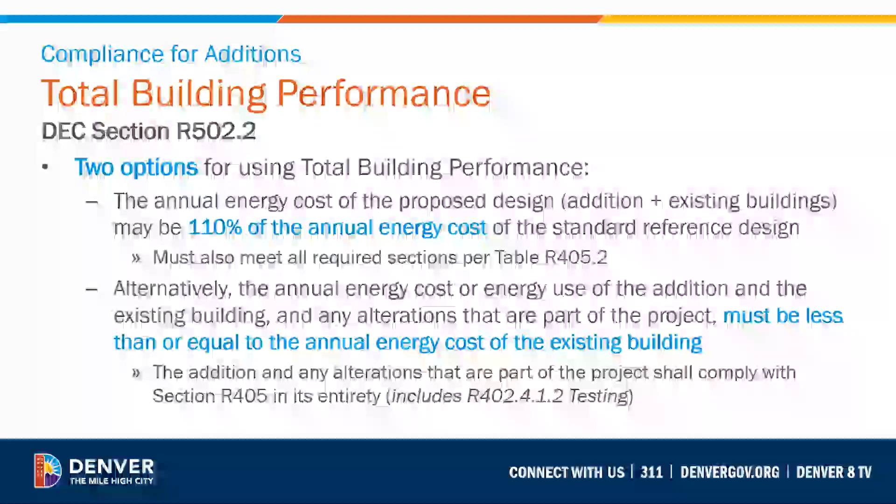Alternatively, you can demonstrate that the annual energy use of the addition, the existing building, and any alteration that's part of that project is less than or equal to the annual energy cost of the existing building before you begin the project. So again, you'll have to do an analysis before and after the project.

When using an energy rating index compliance option for projects undertaking an addition, the energy rating index of the addition, the existing building, and any alterations that are part of the project must be less than or equal to the energy rating index of the existing building. This is just like the total building performance compliance option 2 discussed earlier. In both cases, this requires an energy model of the existing building prior to any work performed, and also after the addition was constructed—so you'll have to do that modeling twice at least.

Prescriptive compliance for alterations: use the prescriptive R-value and U-value tables only for envelope assemblies that are part of the alterations. This means there's no performance compliance approach that can be used. Therefore, you'll only have to comply with limited prescriptive provisions.

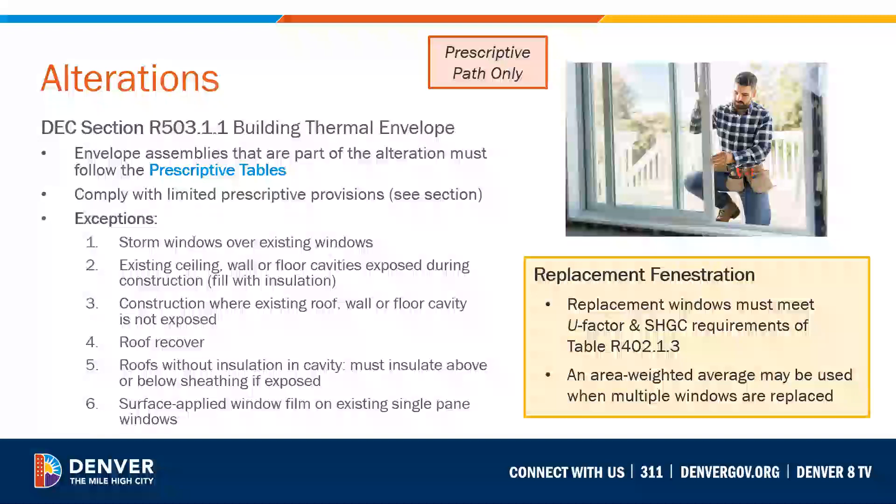We also recommend that you review the existing home section in Chapter 5 for these types of projects. Remember that regardless of compliance options, there are additional compliance provisions that apply to additions and alterations. The HVAC, hot water heating system, and lighting requirements are examples of that.

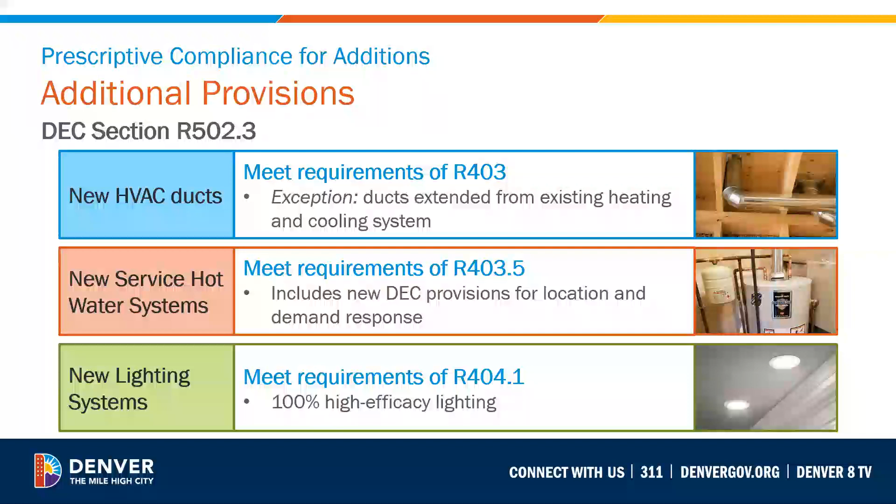Repairs include the reconstruction or renewal of any part of an existing building for the purpose of its maintenance or to correct damage. Components of buildings or systems must be maintained to meet the requirement of the code edition under which they were originally installed, which means they don't necessarily have to meet or be brought up to the modern day 2022 Denver Energy Code.

Note that work on non-damaged components necessary for the required repair is considered part of the repair and does not need to meet the requirements for alterations.

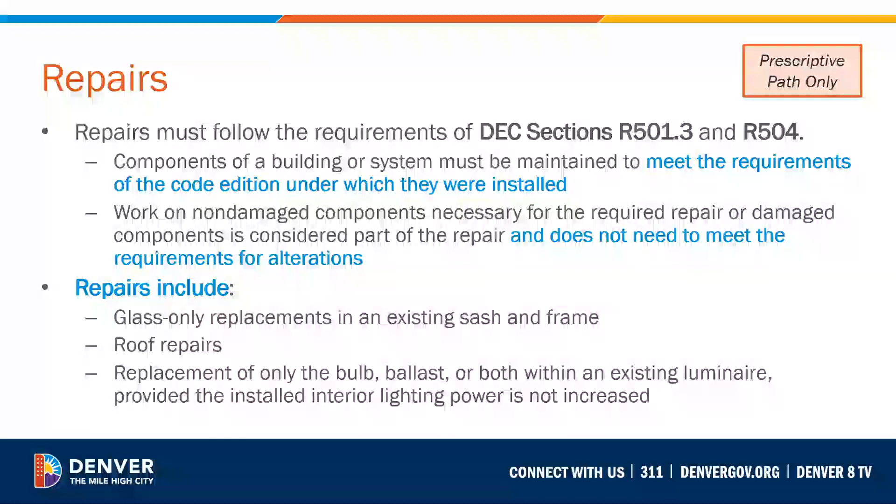Projects with a change of occupancy or use to a residential building must meet the applicable requirements in Chapter 5, as it will result in either an addition, an alteration, or a repair. If the change is from a low energy demand category as defined by the IBC, or the International Building Code, occupancy, it must meet all requirements for new construction unless the change does not result in increased energy demand.

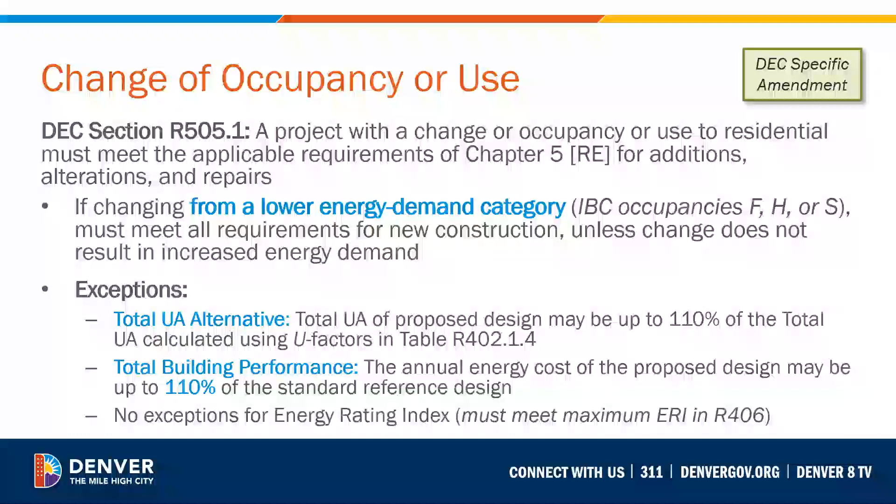The exception to this is when you use the total area weighted alternative to demonstrate compliance. The UA of the proposed design may be 110% of the total maximum area weighted U-value that's calculated for the reference home.

Energy is an interdisciplinary, holistic, and synergistic discipline. The Denver Energy Code touches on many of the components and assemblies, and builders, architects, and trade partners must be coordinated and trained for successful compliance.

So take some time and review the Energy Code before you start your project so you know how to best move your way through compliance with the code. Know your compliance pathway and the unique considerations and construction flexibility that's built into it.

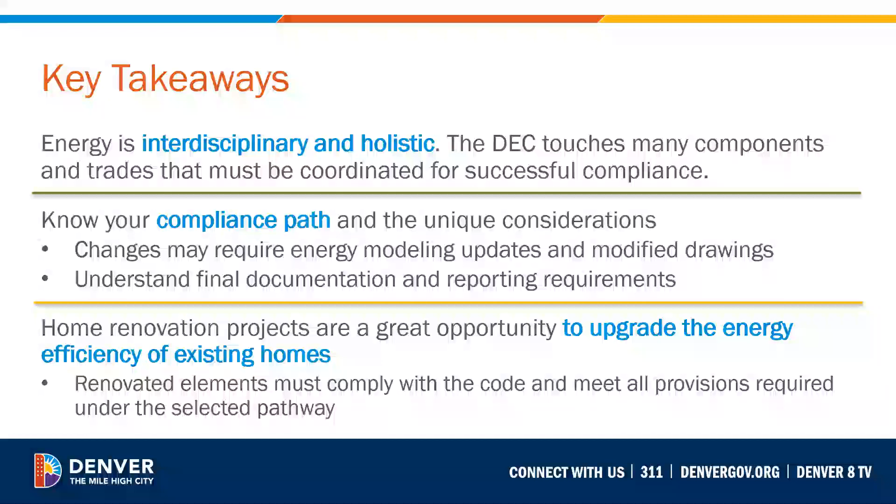If you understand your compliance pathway and you're sure that the project complies with all the code, and meets all the provisions required under the section and pathway that you're using, you can often increase the efficiency of the base home, as well as the addition or alteration that you're trying to achieve there.